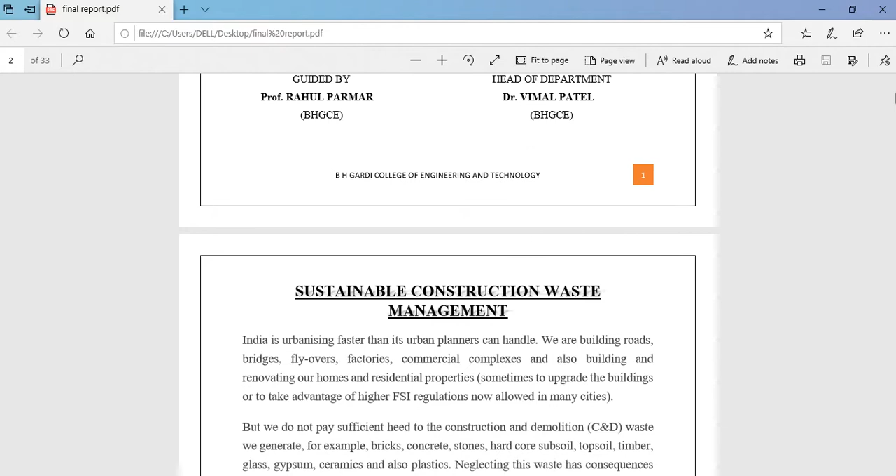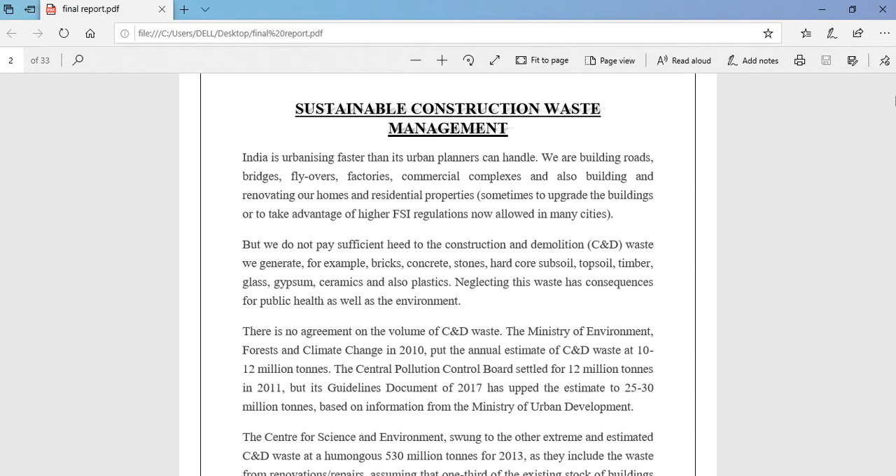Sustainable construction waste management. India is urbanizing faster than its urban planners can handle. We are building roads, bridges, flyovers, factories, commercial complexes, and also building and renovating our homes and residential properties, sometimes to upgrade the buildings or to take advantage of higher FSI regulation now allowed in many cities. But we do not pay sufficient heed to the construction and demolition waste we generate.

For example, bricks, concrete, stone, hardcore subsoil, topsoil, timber, glass, gypsum, ceramic, and also plastics. Neglecting this waste has consequences for public health as well as the environment. There is no agreement on the volume of construction and demolition waste. The Ministry of Environment, Forest and Climate Change in 2010 put the annual estimate of construction and demolition waste at 10 to 12 million tons.

The Central Pollution Control Board settled for 12 million tons in 2011, but its guideline document of 2017 has upped the estimate to 25 to 30 million tons based on information from the Ministry of Urban Development. The Center for Science and Environment swung to the other extreme and estimated construction and demolition waste at a humongous 530 million tons for 2013, as they include the waste from renovation repairs, assuming that one third of the existing stock of buildings carried out renovations or repairs in 2013.

The most recent annual estimate of construction and demolition waste in Indian cities is 165 to 175 million tons, jointly prepared for the period 2005 to 2013 by two government agencies, the Building Materials and Technology Promotion Council and the Center for Fly Ash Research and Management. This waste is dumped illegally on vacant sites, on the sides of highways, below flyovers, beside lakes and rivers, in the low-lying areas and open stormwater drains.

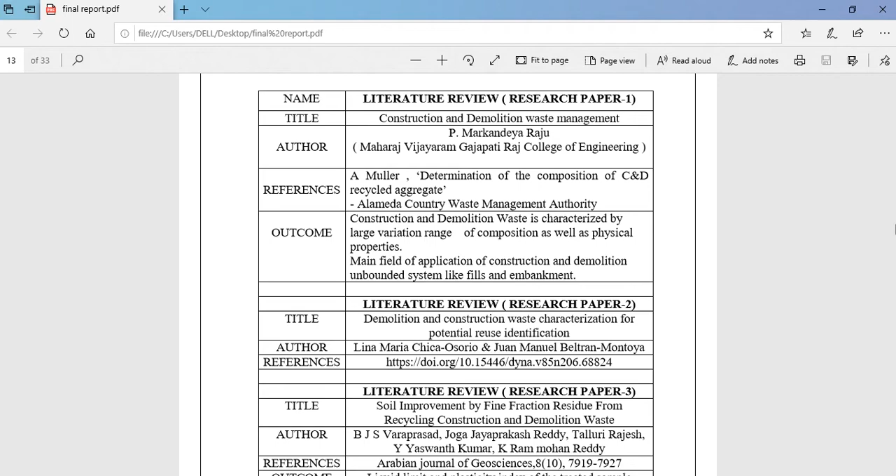The literature reviews. The first literature review. The title of this literature review is Construction and Demolition Waste Management. The author of this paper is P. Markandeya Raju, Maharaj Vijayaram Gajapati Raj College of Engineering. References are Muller, determination of the composition of construction and demolition recycled aggregate, Alameda County Waste Management Authority. Outcome of this paper is that construction and demolition waste is characterized by a large variation range of composition as well as physical properties. Main field of application of construction and demolition waste: unbound systems like fills and embankments.

Second literature review. Title of this paper is Demolition and Construction Waste Characterization for a Potential Reuse Identification. Author of this paper is Lina Maria Chica-Osorio, Juan Manuel Beltran Montoya. References given is a website link.

Third research paper. The title of this paper is Soil Improvement by Fine Fraction Residues from Recycling Construction and Demolition Waste. Author of this paper is B J S Varaprasad, Joga Jayaprakash Reddy, Talluri Rajesh, Y Yaswanth Kumar, K Ram Mohan Reddy. References of this project is Arabian Journal of Geosciences, and outcome of this paper is the liquid limit and plasticity index of the treated sample decrease with an increase in construction and demolition waste for all percentages, as construction and demolition waste is a non-cohesive and pozzolanic material.

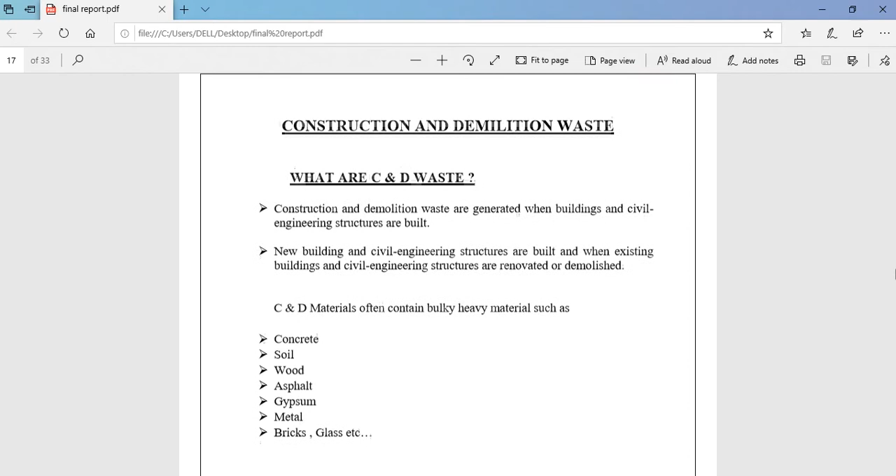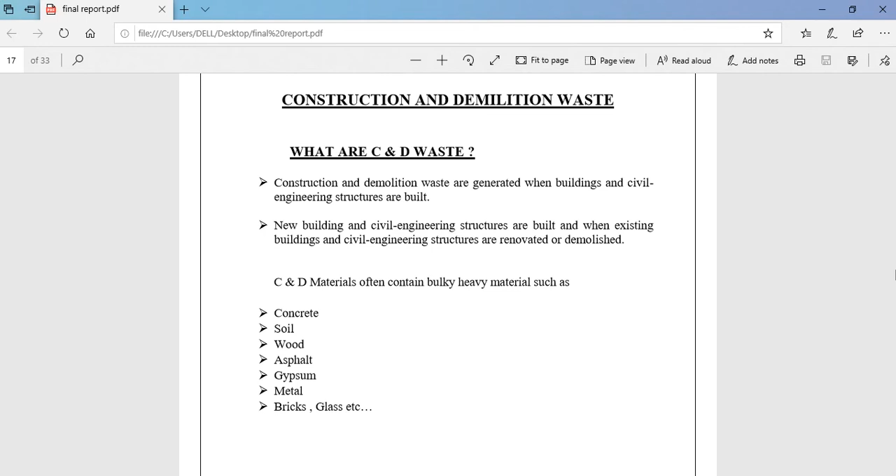Construction and demolition waste. What are construction and demolition waste? Construction and demolition waste are generated when new buildings and civil engineering structures are built, and when existing buildings and civil engineering structures are renovated or demolished. Construction and demolition materials often contain bulky and heavy materials such as concrete, soil, wood, asphalt, gypsum, metal, bricks, glass, etc. 4R of construction and demolition waste.

The first is reduce. Source reduction reduces recycled material use, energy use and waste generation. While reuse and recycling are important methods to sustainably manage waste once waste has already been generated, source reduction prevents waste from being generated in the first place.

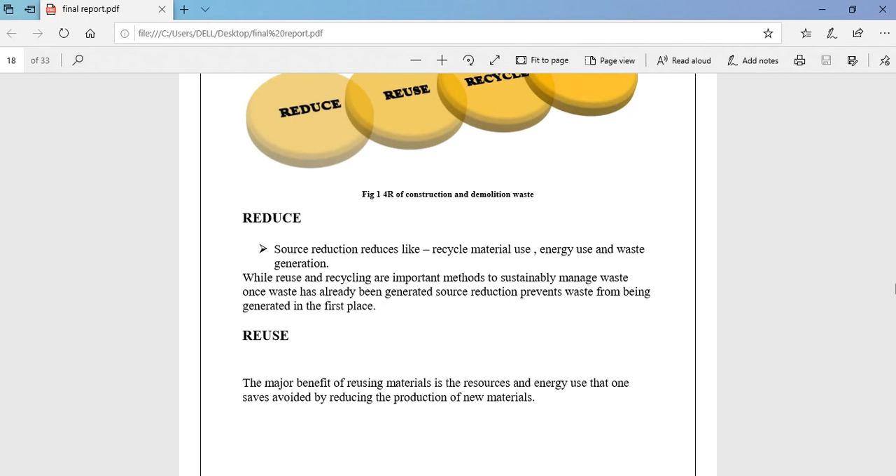The second one is reuse. The major benefit of reusing material is the resources and energy one saves by reducing the production of new materials. The third one is recycle. Many building components can be recycled where markets exist. Asphalt, concrete, and rubble are often recycled into aggregate or new asphalt.

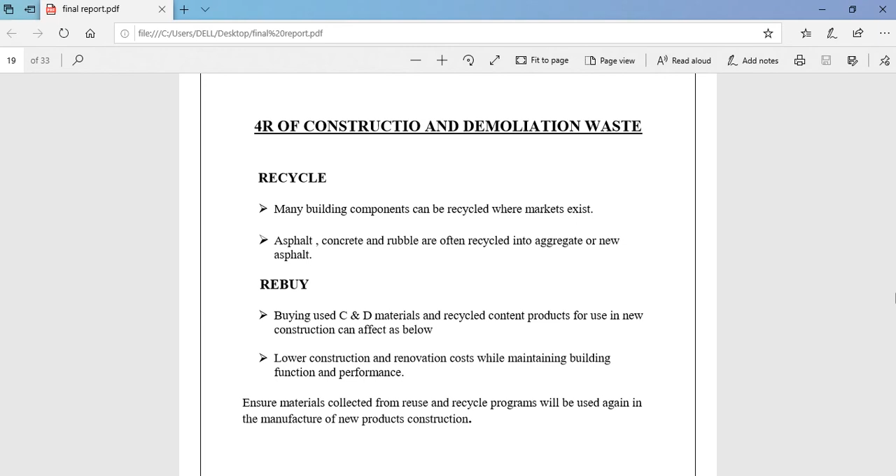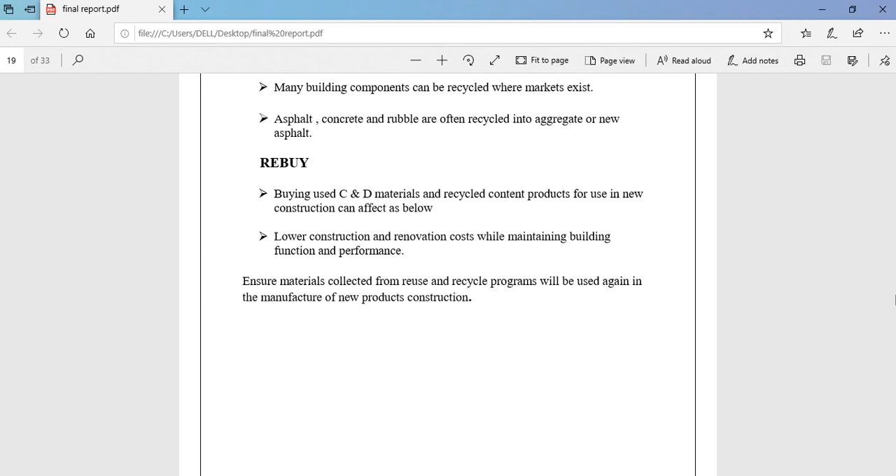The fourth one is rebuy. Rebuy, buying used construction and demolition materials or recycled content products for use in new construction, can lower construction and renovation costs while maintaining building function and performance. Ensure materials collected from reuse and recycle programs will be used again in the manufacture of new products for construction.

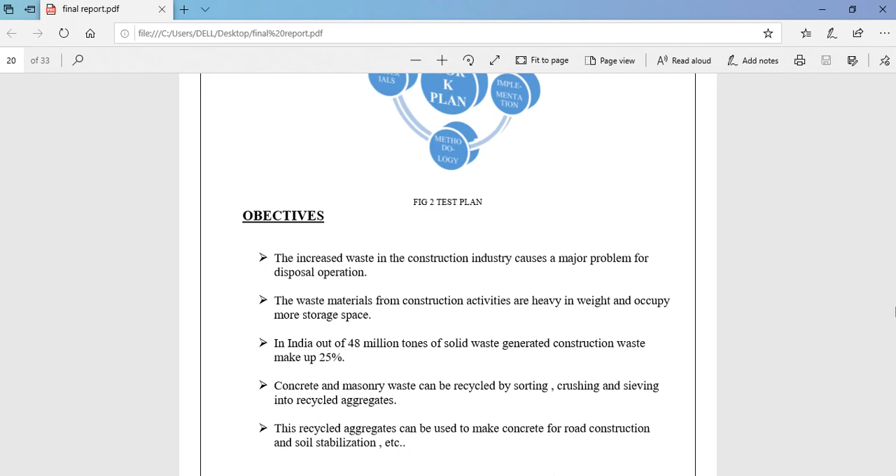Our work plan: objectives, materials, methodology, implementation. The first one is the objectives. The increased waste in the construction industry causes a major problem for disposal operations. The waste material from construction activities is heavy in weight and occupies more storage space. In India, out of 48 million tons of solid waste generated, construction waste makes up 25%.

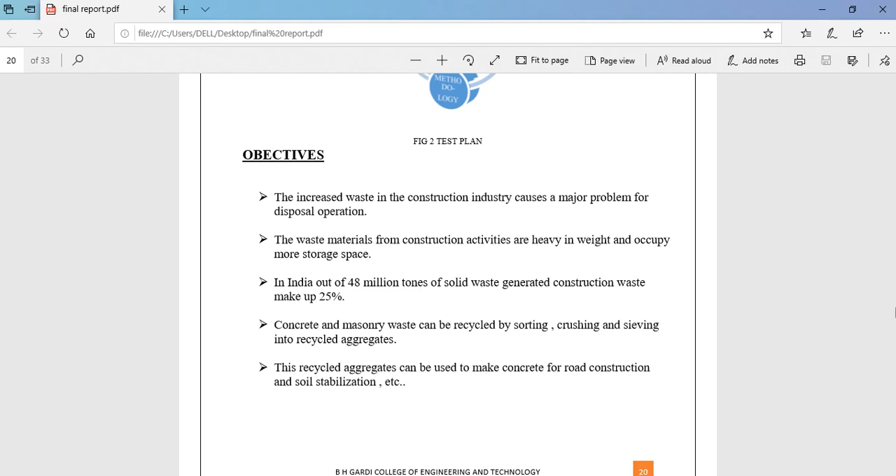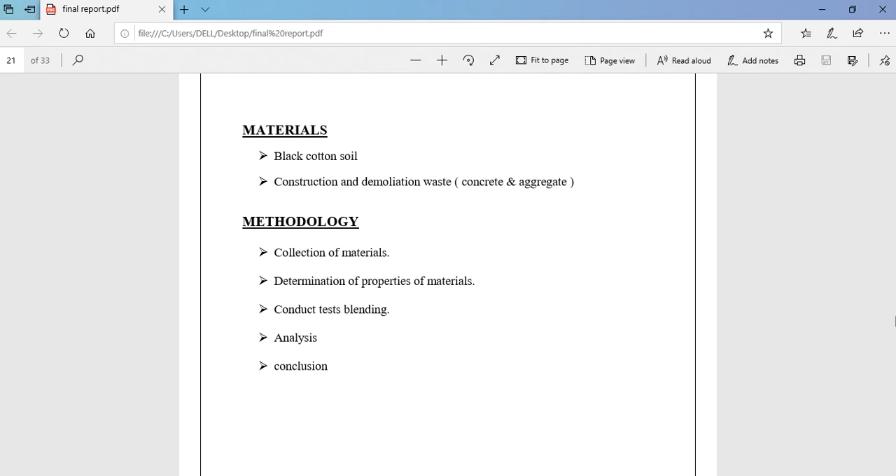Concrete and masonry waste can be recycled by sorting, crushing, and sieving into recycled aggregates. These recycled aggregates can be used to make concrete for road construction and soil stabilization, etc. Materials: black cotton soil, construction and demolition waste, concrete and aggregate. Methodology: collection of materials, determination of properties of materials, conducting tests, blending, analysis, and then conclusions.

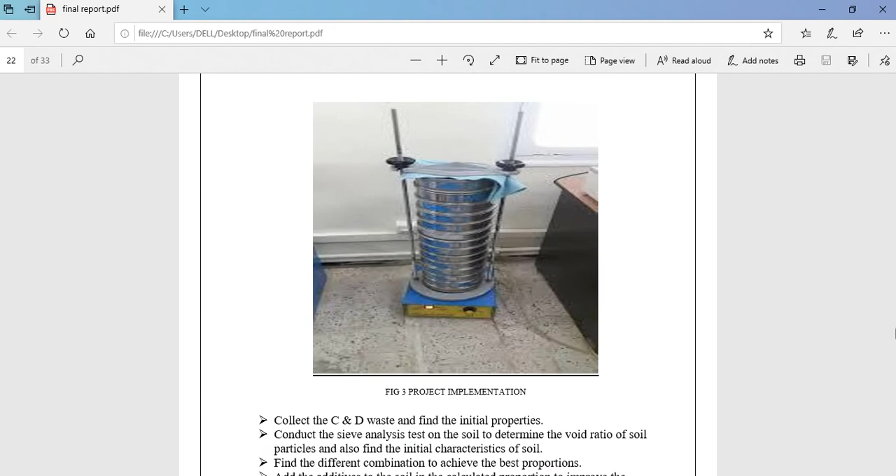Project implementation: this is the figure of the project implementation. Collect the C&D waste and find the initial properties. Conduct the sieve analysis test on the soil to determine the void ratio of soil particles and also find the initial characteristics of soil. Find the different combinations to achieve the best proportions.